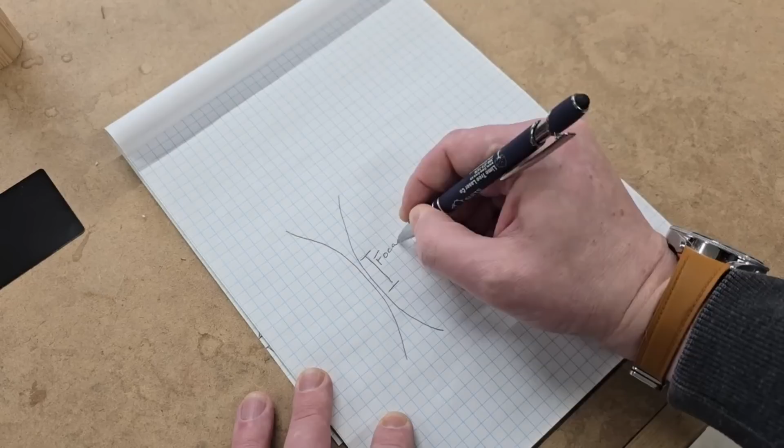If we think of a laser beam running through an optical lens, I think most people understand that we'll start to see a bit of a shape like that of where our laser is in focus versus where it is out of focus. This distance is what we call focal depth. Now, on a CO2 or a fiber laser, a non-3D, depending on your lens, this focal depth can be quite large, actually. One thing that we need to take into account is that with a UV laser, we have a very, very small focal depth.

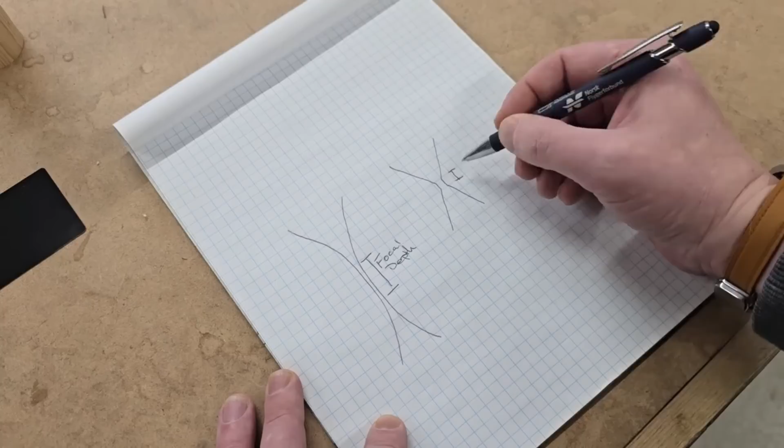Now, with that small focal depth, we get an incredibly great level of detail, but we do need to remember that it is very easy to get out of focus with a UV laser. On some materials, it doesn't make that much of a difference. On glass, this is critical, that we have a very small focal depth, and we need to do absolutely everything we can to ensure that we're marking in the correct location.

So that's just something I really wanted to quickly explain. I think most people do understand this, but hey, you never know. Some people might be buying a UV as their first laser, so this is something important to remember. We'll talk about it a bit more as we get to the laser, but just remember, when I say focal depth, this is the distance we're talking about here.

Okay, guys. Hi, welcome to the video again. Let's get started here. We're going to start with something very simple. We're going to do the aluminum painted card that you may have received with your laser. If not, they're all over Amazon. They're very easy to find. And it's a great way to really dive in and get your feet wet.

So first thing, you'll notice that we're working in our 200 by 200 millimeter workspace. We're going to do that for all three of these objects, so this entire video is going to be run on our 200 by 200. Now that gives us a 120 millimeter working depth, so that's how much Z height we have to work with. We'll be doing everything at 0, so we don't really need to worry about working depth at the moment. We'll get into that.

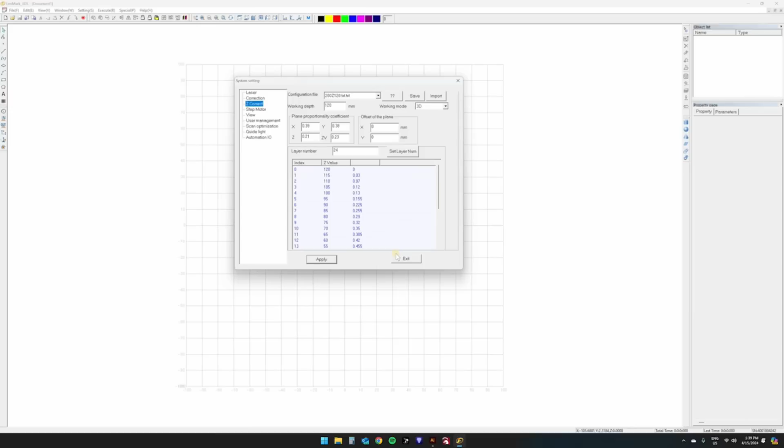So let's get started. First thing we're going to do is import a graphic here. And we've got a nice Haotian logo right here ready to go. We're going to resize it first. Let's just do 50 millimeters by 57. That ought to work just fine. Anytime you're working in this software and you see an apply button, always hit that to double check on things.

Next thing we need to do is set our hatch parameters. I don't want an outline. I'm going to use the optimized hatch with all of the optimization features. I'm going to leave the angle at 0 and we'll set a distance of 0.01 millimeters and hit apply.

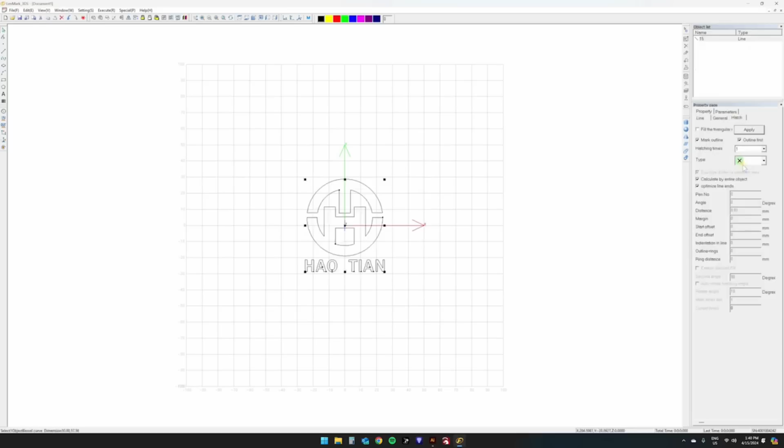Now I'm going to quickly set my parameters here also, and then we'll talk a little bit about how to set it up properly. With this I'm going to do 2000 millimeters per second at a frequency of 60 and a pulse width of 95. I run my laser with an inverted pulse width right here.

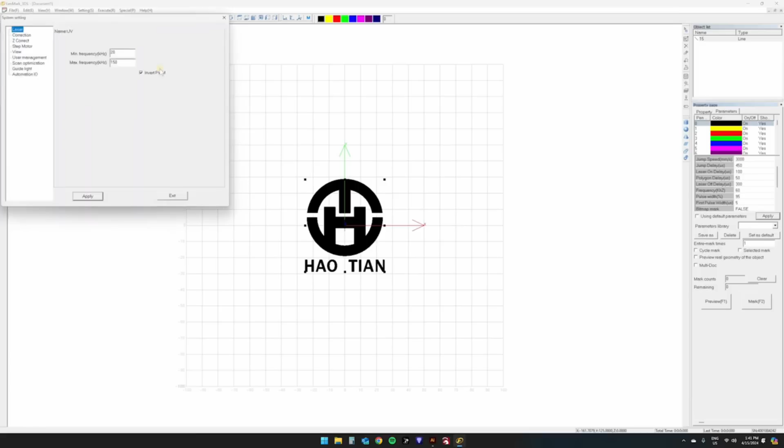And I do that so that 100 is full power and 0 is no power. I think a lot of people don't use the inverted, so your numbers will likely be different. I just prefer it this way. It just is easier for my smooth brain to figure out.

Okay, now, on almost any other piece of software not using a 3D laser, you would think right now you're essentially ready to go. We are not. Because we're using a 3D laser, if we start to rotate around, we can actually start to see that 120 millimeter working depth that I was talking about before.

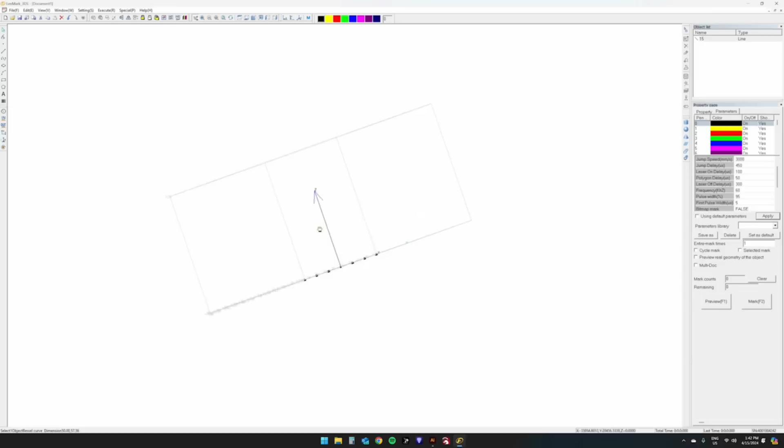Now, the way these lasers work is we always want to start at the top and work down. Technically you can do it from the bottom up. I find it can get a little confusing. And focusing, in my opinion, is a lot easier doing it this way. So what we need to do is move our graphic all the way up to the top of our box, which we know is 120 millimeters.

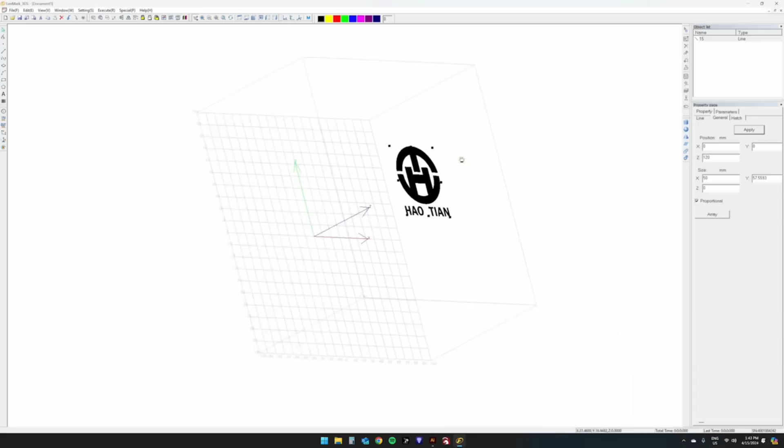So let's go to our properties, into general, and we'll set our Z height at 120 and hit apply. And now you can see we are right at the top there. So now when we go to focus and we use the focus distance that's written on the side of the laser head, we can focus directly down to that highest point. On a card, the highest point and the lowest point are the same, but this is something that you need to remember when we start getting into the 3D stuff, which we'll be doing right after this one.

So we're good to go. We've got our parameters set. We've got our hatch set. We've moved the graphic in its Z height all the way up to 120 millimeters. So let's head over to the laser and focus it and run this engraving.

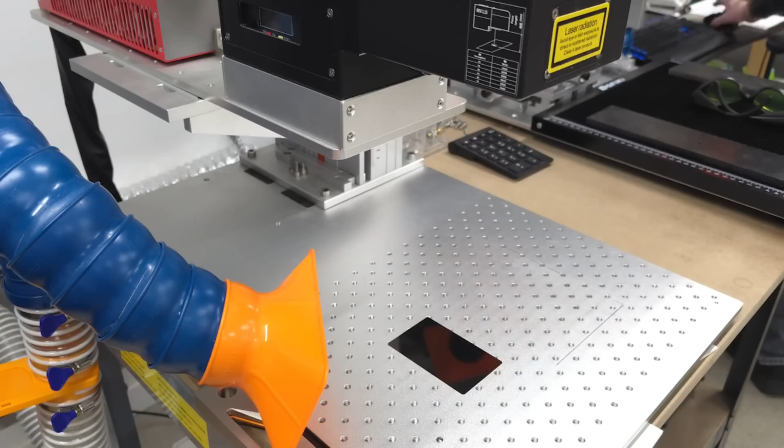Okay, we're at the laser. We have our card ready to go. First thing we need to do is focus our lens to the card. I use these focus sticks that I've made. I've got a few different styles. With this card you can measure. Why don't we show that?

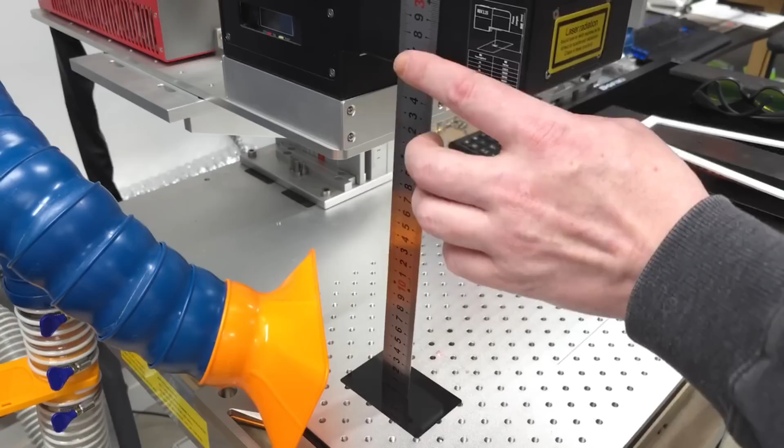You will want to make yourself some focal sticks, because at least here we can move the card off to the side and we can measure up to our mark on the bottom of the head. When you're using a 3D object or a glass that's going to be directly under the lens, it gets really difficult to use a measuring stick, so you'll want to be making a focal stick for that.

We can reference our chart here for our measurement height, and our 200 by 200 workspace requires a 234 millimeter distance. I'm just going to move it to the front so I can see it a little better. 234, there we go.

Now you can see we have our outline. It's a little difficult to see on this black card. These gels can help quite a bit. I'll have to give Dean a big thank you for sending me this. I believe it's a photography flash gel, but they work great.

We're ready to go. I use a wireless mouse here with shortcuts set on these buttons here. I believe it's F1 and F2 to preview and fire. So here we go, let's fire it.

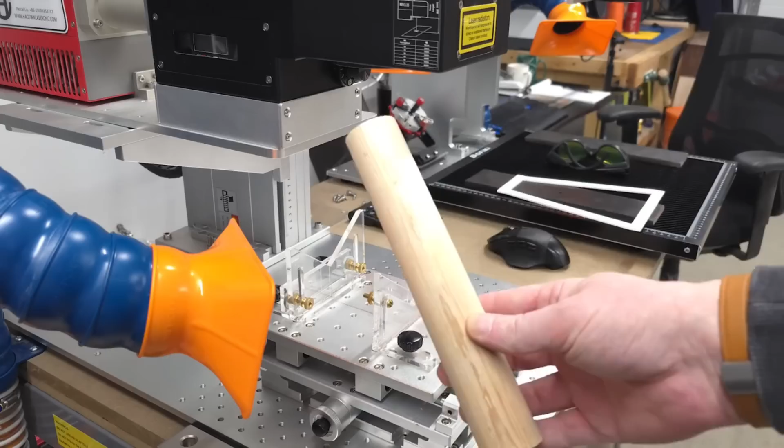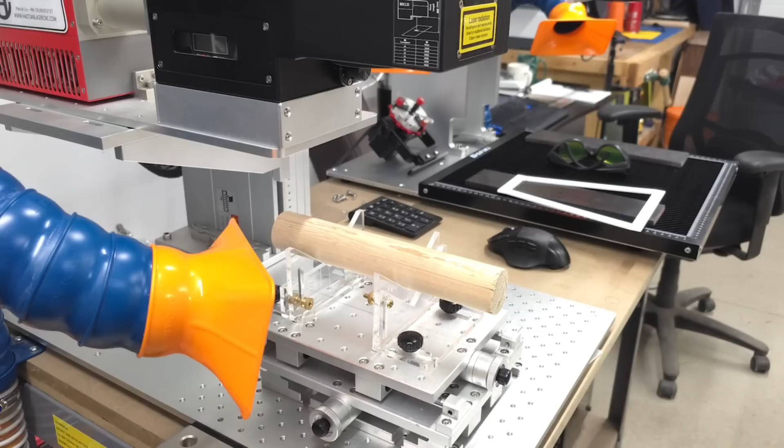Okay, moving on. Next thing we're going to do is do a mark on this 1.5 inch diameter piece of Hemlock dowel. Again, wood isn't quite as focal dependent as glass, so we've got a little bit of leeway. But what I'd like to show you here is that I'm going to be using this same jig setup for glass.

So you'll see that I've got an XY table here. I've ran a center line down it as well. You probably can't see them, but I do have center marks on the acrylic line here. And I simply just projected a straight line and line mark to line everything up with that. We'll talk a little bit more about why that is so important with glass.

Wood, it's not quite as detrimental, but it's a good practice to always make sure everything is as centered as possible when you're working with a 3D laser, and in particular glass. Like I said, we talked about that focal depth a little bit earlier, and with glass, that focal depth is extremely important.

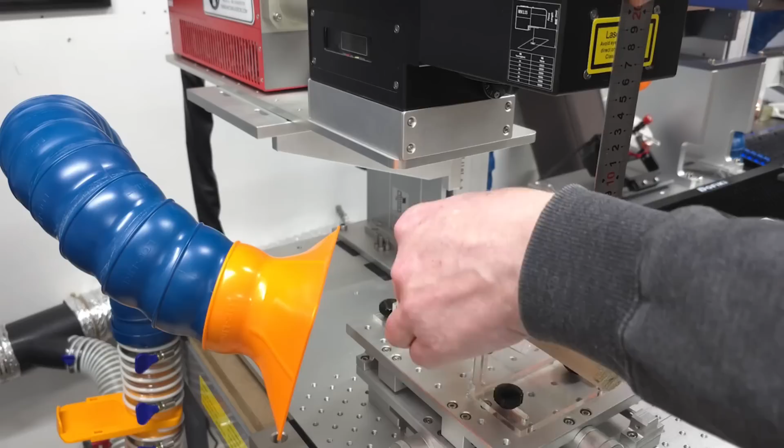So again, same thing we did before. We're going to focus the very top edge of our object to the lens, and this is where I say to use some kind of a focal stick. Again, I guess with this object, we can really pull it down a little bit and measure from there. Now, if this was not nearly this long and we needed it there, we can't really measure from there.

So let's upgrade to our focal stick. Let's use that for the rest of this video. Move the head up. And focus to that top edge. There we go.

Now, I typically like to set my object in its place and get it ready to go before I move into the software. And the reason for that is that you get a little bit better of an idea of your framing and everything. You want to make sure everything's in focus. And it's very easy to hop over into the software, get everything set, start framing, and then things don't look right. And the reason for that is that you're not focused yet, and sizes will change when they're out of focus.

So getting your object down, aligned, and focused first is just a good way to make sure that you don't skip a step later on. So that's ready to go. Let's move back to the laser. Sorry, back to the computer. Okay, here we are back in Landmark. I've just started a new document and just imported that same graphic. So let's get started again.

First thing we need to do now is create a model to engrave on. We're using a cylinder, so we'll start with that. We're going to need a calculator because we're working in millimeters. So a simple cylinder. Now, I said before that this was 1.5 inches. So let's get that into millimeters. That's 38.1. We'll divide that by 2 to get our radius, 19.05.

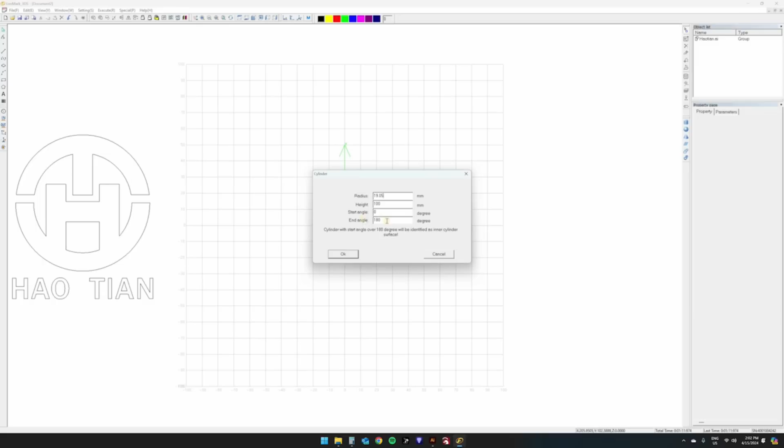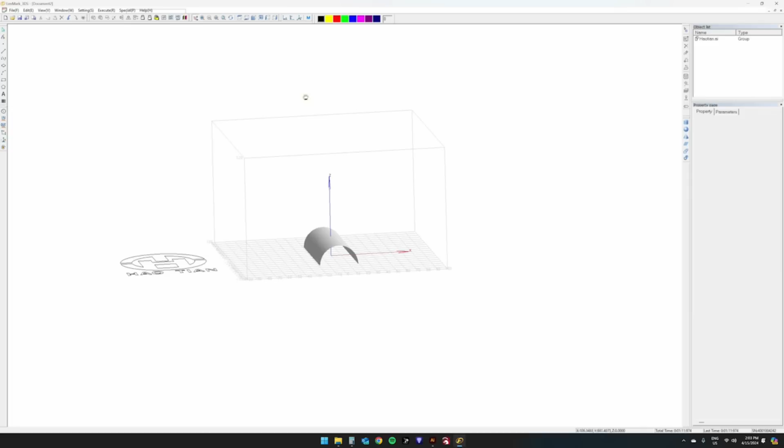For this particular object, our height doesn't really matter much. And I'll do a start at 0 and end at 180, so we only have half of a cylinder. There we are. That is our model that we will be projecting this graphic onto. Now, same thing. We need to move this up to the top of our working height. And we're going to have to put a little math into this one. Let's select it first. We can bring up our move window.

So we know our radius is 19.05. So let's just take 120, subtract 19.05. That gives us 100.95. That is the height we need to move this up to get it to the top. So we'll add that into our Z column. We'll click the relative position and hit OK.

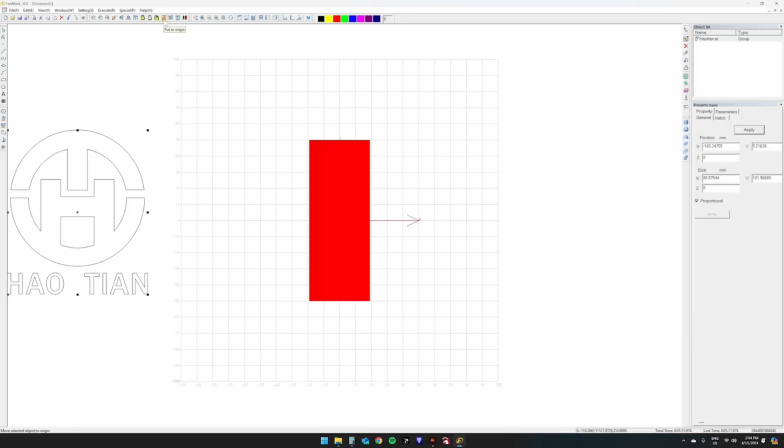Now we can choose a side view just to quickly verify that we did our math correct. The top of our cylinder is at the top of our working field. So we know that's good. Let's go back to our top view. We're going to select our graphic and bring it back down to the origin, which is 0 X, 0 Y.

Now for placement, I usually like to bring it up to 120 so we can see it on top of our object. Obviously this is a little bit big, so why don't we move that down? Let's do, say, 75% of diameter. So we have a 1.5 inch cylinder. We'll turn that into millimeters by multiplying by 25.4.

So that gives us 38.1 as a diameter, and let's multiply that by 0.75. So that's a 75% of diameter, which is a pretty common target for most cylinder engravings. 28.575.

So we'll resize this proportionally by that 28.575 and hit apply. That's looking pretty good. Next thing we need to do is we need to hatch this. Again, I don't want an outline. I'm going to do a bidirectional hatch on this one. I find it works much better for wood. Again, all of the options selected, but this time we're going to do a 0.07 millimeter line distance.

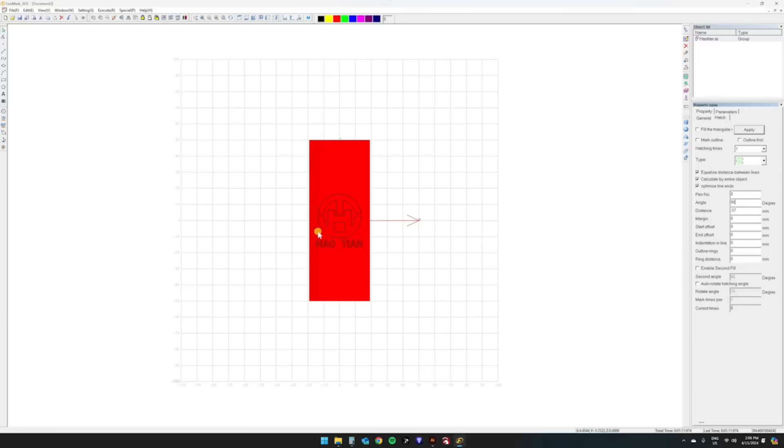And there's a few schools of thought on this when doing 3D engraving. Some people like to do a 90-degree hatch, which would be this direction, so that you'll essentially be engraving the entire thing left to right, and the focus lens doesn't have to do as much work. It only really has to move in, then out, then back in. If you're doing a 0 degree where you're moving, say, from bottom to top, your focusing lens on the head is going to be focusing in, out, in on every single pass.

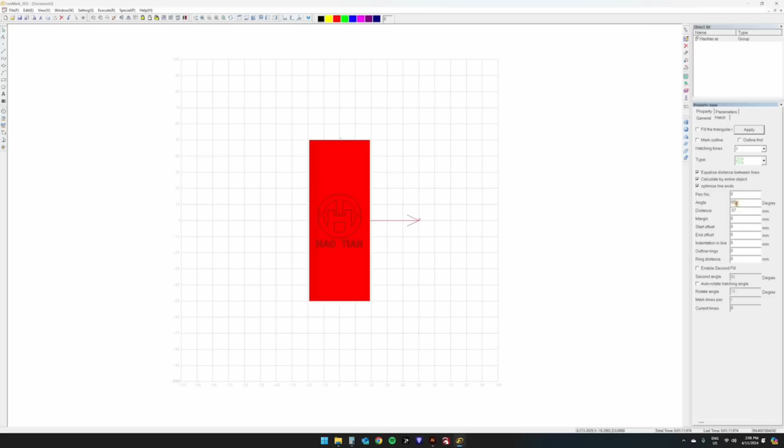Now, that being said, I'm going to do a 45 degree. And I'll tell you why. It's because with wood, I like to go very slow. We've got a pretty big line distance on our hatch, so I'm going to go right down to 100 millimeters per second. And that gives it a lot of time for that focusing lens to do what it needs to do. I will quickly set 65 kilohertz frequency, and again we'll run this at 90%, and again inverted pulse width, so we're on the higher end of power. We'll hit apply.

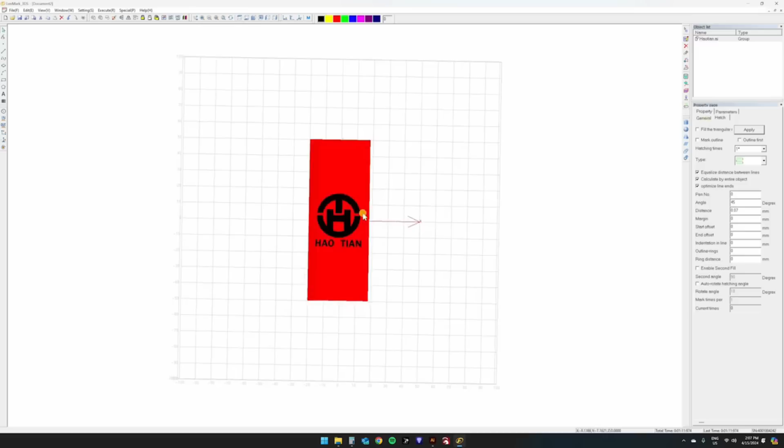Now, this is one of the common problems Mark has been seeing when we're projecting a graphic onto a cylinder. It's a little different when you're using these tools. You can actually project from that 120 height. When using imported models, you always have to have the graphic down at 0. And to be honest, whenever I'm doing a projection onto a 3D object, I always just start at 0 anyways.

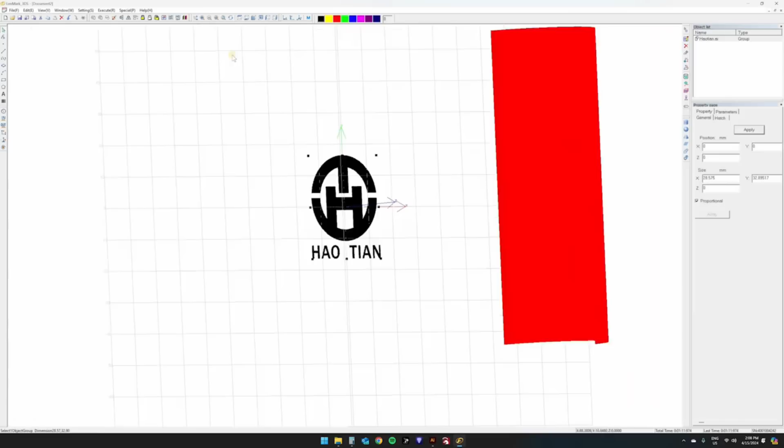You can still use the wrap feature, or you can also use the straight projection. Again, it's kind of hard to see. The difference is that this projection mode essentially projects it straight down. So you'll see that, again, it's kind of tough to see, but this is starting to stretch out from our original width up here. Whereas if we do the actual wrap, it's the same size. So essentially what it's doing is it's taking the graphic, and you can think of it as just shooting it straight down. So if you're looking at this object with your eye from this space, you will see that exact shape.

So I'm sure a lot of you know that when we're doing circular objects on a wrap on a cylinder, we start to get that egg shape. So we correct that by stretching our circle out into an oval, so that when we engrave it, we actually have a circle when you're looking at it. This straight projection mode is essentially just doing that for us. And if you're using an imported model, you'll have to use that mode anyways. So I use it most of the time. Sometimes I don't. It really depends on what I'm doing.

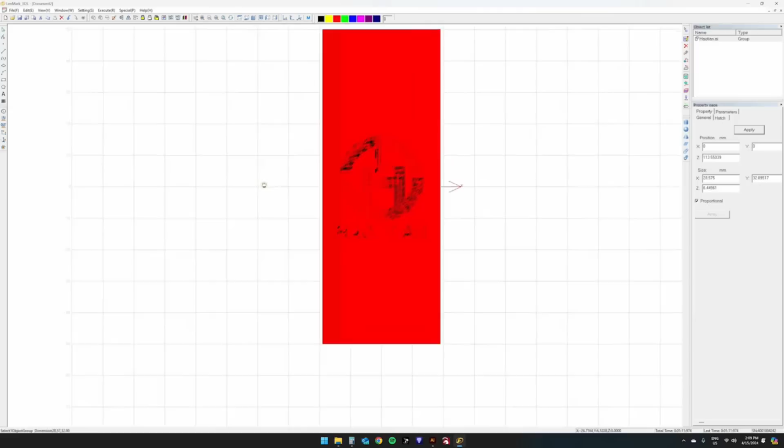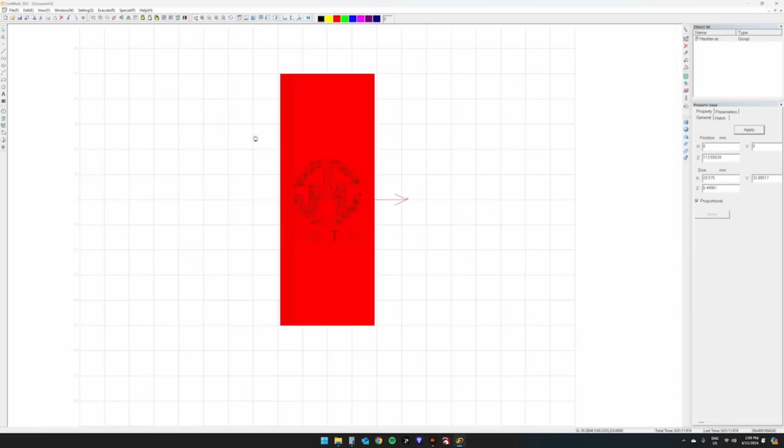So again, let's take a quick inventory. We've set our burn parameters of the Haotian logo here. We've projected it onto our cylinder. You can see it wrapping around. And we're also at the very top of our 120 mil working depth. So we are ready to go. Let's go back to the laser.

Okay, here we are. So again, we've already focused. We've already placed our object. We've got everything on the software set the way we want it. We can do a quick preview. Looks pretty good. Now I'm going to take this off of the tripod so we can get a better look at the actual engraving. Here we go. Let's fire away.

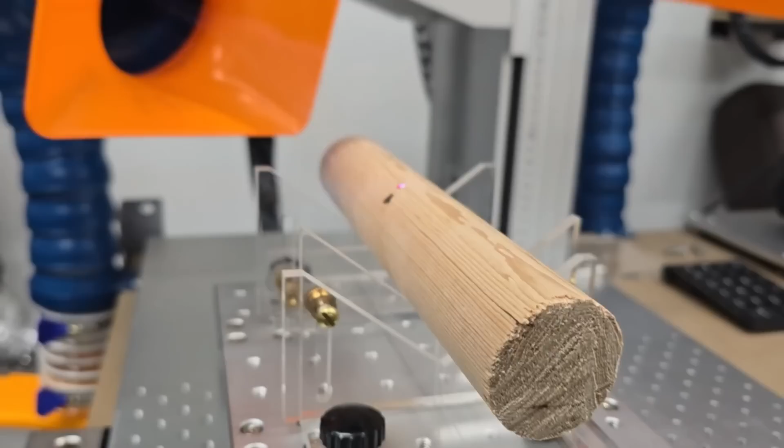Now again, I told you I like to go pretty slow with wood, but that beautiful black engraving is exactly why that can be tough to get with the CO2. I'm just starting to wrap around the other side now. Get a proper focus.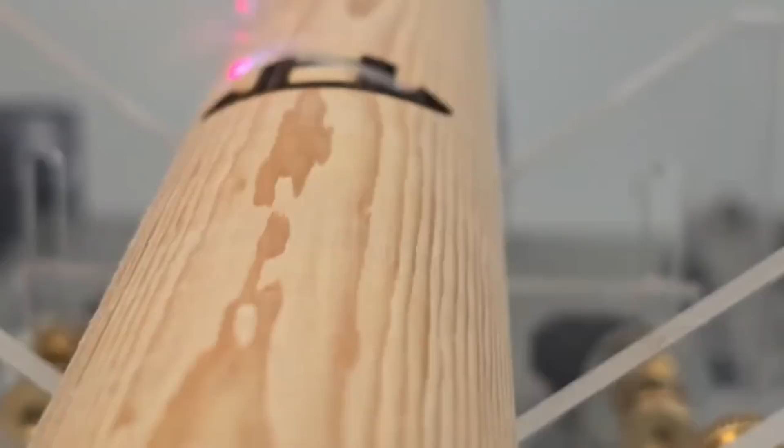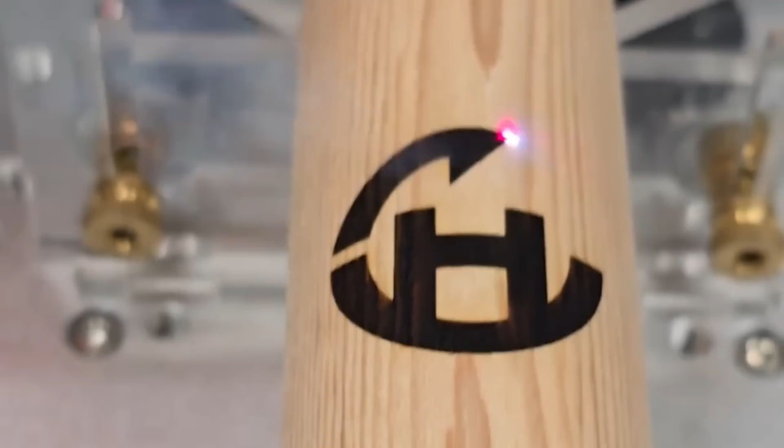With wood, you really can go a lot further on the diameter. Wood is very easy to engrave with the UV laser. Just a little bit of text left, and we're done. There we go. That's it. You can see we got that wrapped down.

A little tough to focus, which is going to be a lot more fun to deal with when we do glass. You'll find out glass can be really tricky to try and video and engrave at the same time. Now here's what I'm talking about with those projection modes. You can see that the circle is actually quite a bit distorted when you're looking at it from the side. But if we look at it directly straight on, we have a perfect circle. So that's really just what that projection mode is doing. Again, play around with it.

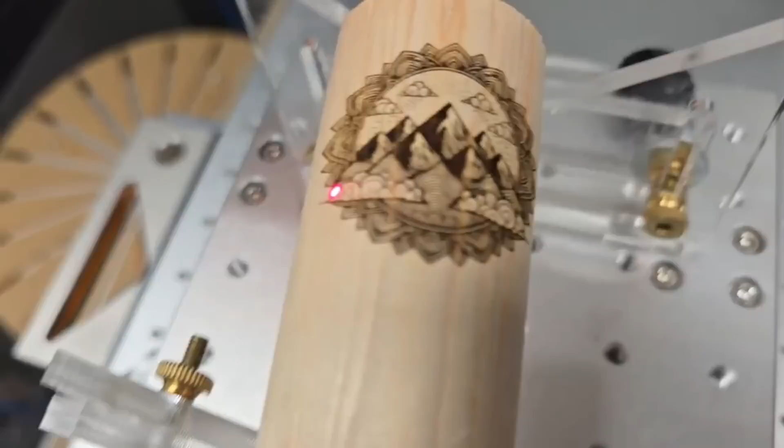So there we go. This dowel I just bought from Home Depot. Actually, it was in the trim section, so I was able to just cut off a couple of feet. It only cost me a couple of bucks. And I'm not going to lie, engraving these dowels is a whole lot of fun. Here's another engraving that I've done on it, and you can really show off the detail that UV laser can get. And it's the exact same process, same settings, same everything, just a different graphic.

So there we are. Congratulations. That may or may not be your first 3D engraving. If it is, good job. You're probably having a ton of fun right now. So let's move on to the real challenge. Glass can be tricky. It can be very tricky, and all of the things we've learned so far, we really need to take into account.

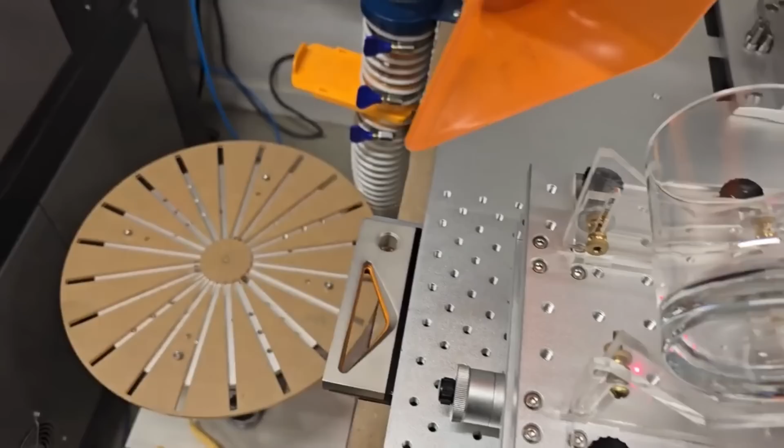Now, like I said, I'm going to be using this exact same jig for this glass. We're going to be doing a little bit different setup in the software, just a few extra steps, but we're still going to use a cylinder. Again, having your jig centered is critical. If you're using a proper cylinder, ensuring that this top is level is also critical. Now, I know that this is a cylindrical cup, and I know the height of these two standoffs are equal, so I know that this is level.

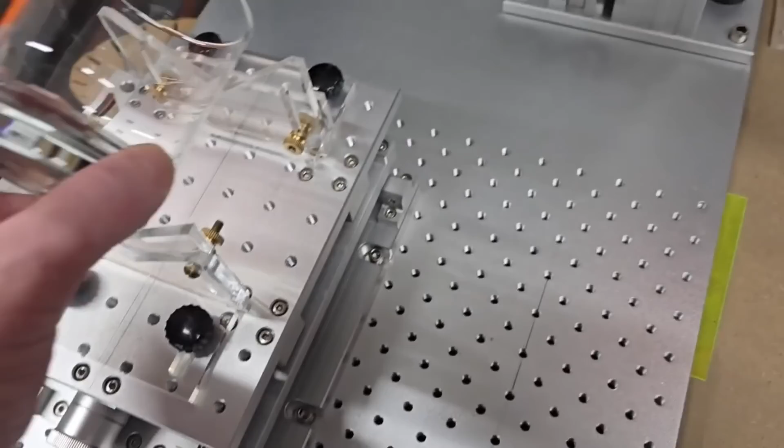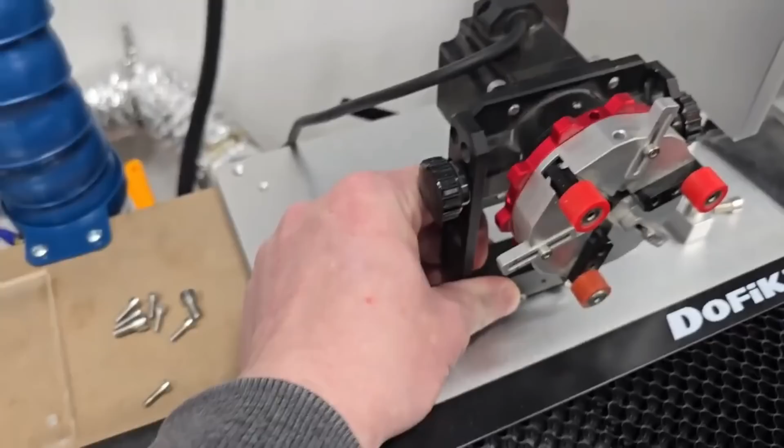Now, being level is only pertinent if this is a cylinder. If you have a tapered cup that has a smaller diameter at the bottom, we don't want that top level. We want to make sure the cup is straight. And there are many different ways to do that. You're going to have to find your own way. I find using my grip rotary is a great way to keep things straight for tapered cups when doing glass. I don't actually use the rotary, I just use it to hold glass. But for cylinders, this works great.

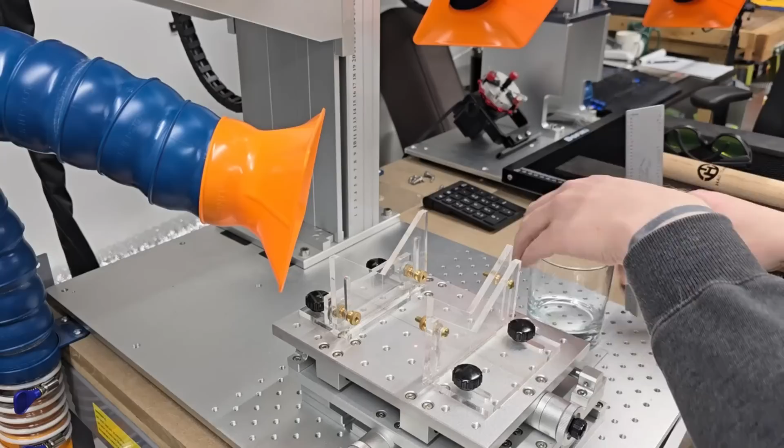Now I'll quickly pop this back into the tripod here. Sorry for my fat fingers. We're going to do the exact same thing. We're going to set our focus height, again with our focal stick. Now actually, I'm going to double check this because this is not looking like a true cylinder. It is not. There is quite a taper to that. So I'm going to reset. I'm going to set up with the grip rotary there. And we'll come right back.

Okay, we're back. So we've reset using our grip rotary. One thing I'd like to mention is that I have the head of my laser squared to this table. So what that means is that I can use my engineer square to ensure that the XY table is square to the table itself. And then I can also make sure that the rotary is square to the XY table. That's going to keep everything straight in both our X and Y directions.

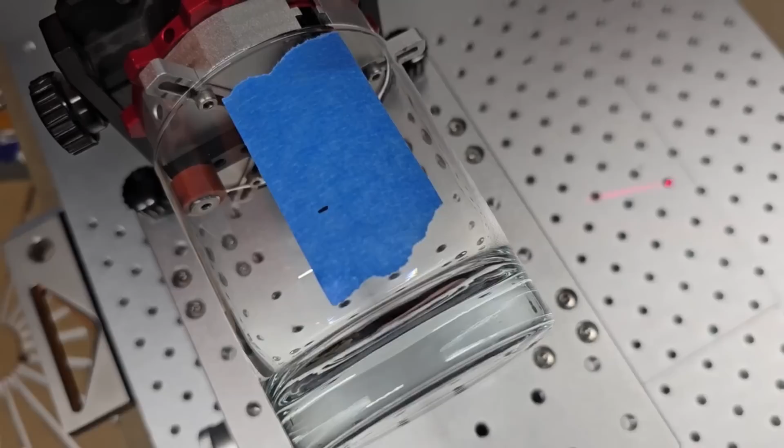Now, I know that this rotary is already centered in our X axis, but we do need to center the glass in our Y axis yet. So I just put a quick piece of tape onto the cup and mark its center line, and we're just going to move the XY table until our alignment cross lines up with that mark. So there we go. Our glass is centered in our X direction, it's centered in the Y direction, and let's remove this from the tripod again.

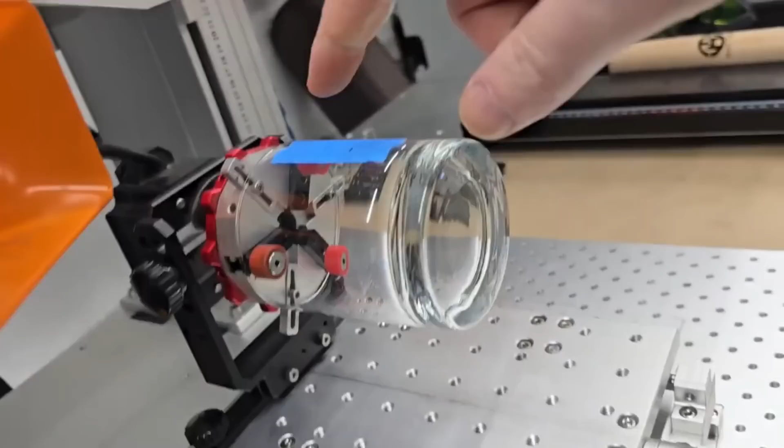This top edge surface is not level. The central axis of this glass, you can imagine going through the very bottom all the way through. This central axis is parallel to the table. That is the important thing with the UV laser. That's how our model is going to be set up.

If this top surface was level, we also have to figure out how to rotate the model in our software to reflect that. That's a tricky process. I know this rotary is set up with a face square, which means that I know this central axis is also parallel to the table and will match our model in the software. And again, we'll double check our focus to the highest edge, which will be at the top.

There we go. Remove this piece of tape. All right, let's head back to the software and get this set up.

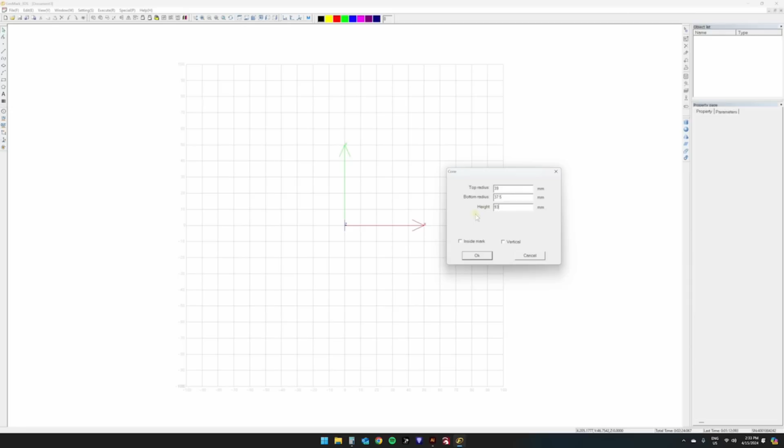And we have a height of 93. We'll hit OK. There we go. We have our cone. Now again, same as before, we need to move this top edge right up here, which will be our highest point, up to our 120 millimeter working space. So we will move it again. And you can go back to your cone here just to reference your heights and radiuses.

So we have a top radius of 39. So again, onto our calculator, we'll do 120 minus 39. That means we need to move this object up by 81 millimeters in the Z height. So again, into the Z.

I've already forgot what that was because I have the memory of a goldfish. Sorry about that.

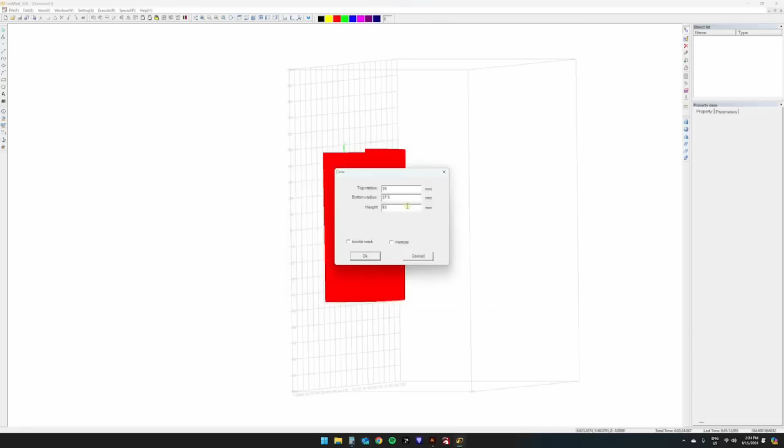Top radius of 39, 81. Let's remember that this time. We're going to move that up by 81 millimeters relative. Okay. Again, you can do a side or back view to double check that the very top edge of your model is going to be at 120. So we're good to go. Our model is set.

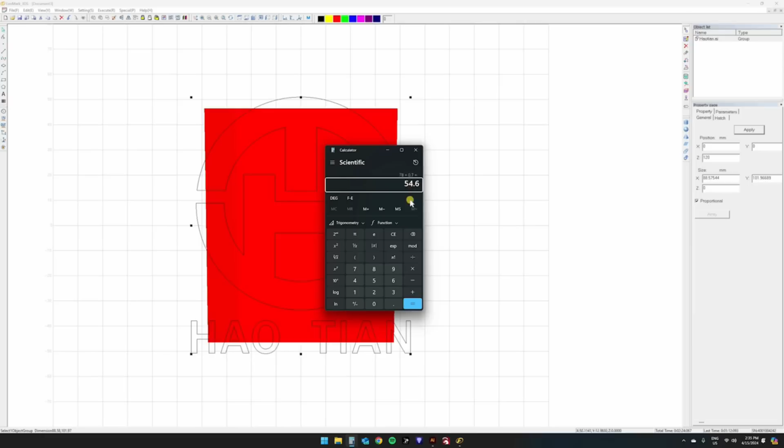So again, we'll import our Haotian logo. And again, I like to always move it up to 120 so I can see what I'm doing. Now for this, we said we had a top diameter of 78. Let's target 70% for our width. So we'll multiply that by 0.7. That gives us a 54.6 millimeter width for the graphic. So we'll just call that 54. We'll resize that in the X direction proportionally.

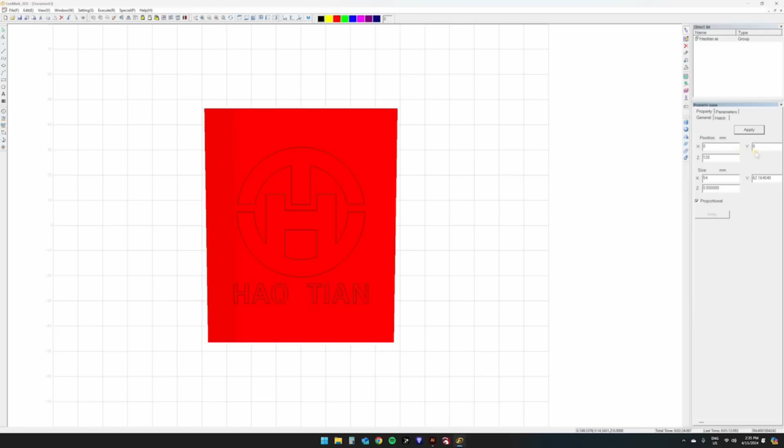We'll hit apply. Now this rocks glass has a very thick glass bottom, which is somewhere around here. We could actually measure it, but I'm not going to. What I'm saying is that it looks a little funny if you engrave over that thick glass bottom. So let's just move it up a little bit. I think that'll look quite nice there. Apply, and we'll move on to our hatch settings.

Glass, I like to use a bidirectional. And this I actually do like to do an outline, and I like to outline it first. Sometimes I find it just gets the laser firing a little quicker, and sometimes you'll get a bit of a lighter engraving on your first passes, so an outline seems to help with that. Again, all the optimization settings on. I also like to use a 45-degree angle for glass because we're still going to be moving quite slow. Use a 0.025 millimeter line distance and a single pass. So we'll hit apply on that.

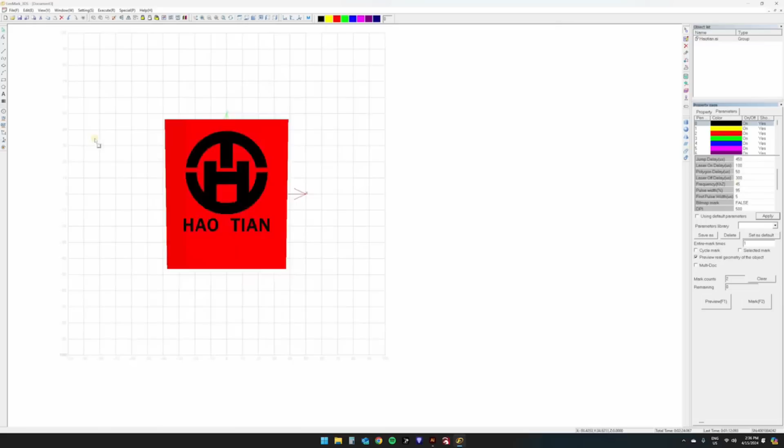Let's quickly move into our parameters again. For glass on a single pass, I like to run a 350 millimeters per second speed with a 45 frequency and pretty close to full power, 95. Again, I am using inverted power pulse width modulation, so 95 is almost full power for me. We'll hit apply on that. Now again, we want to move this graphic back down to 0.

And then because it is a circular logo, I like to use the straight projection. And those lines always look a little funny. This is just one of those oddities of LaserMark. It kind of just is what it is. Sometimes things can look a little funny, but once you get to the engraving, it looks just fine.

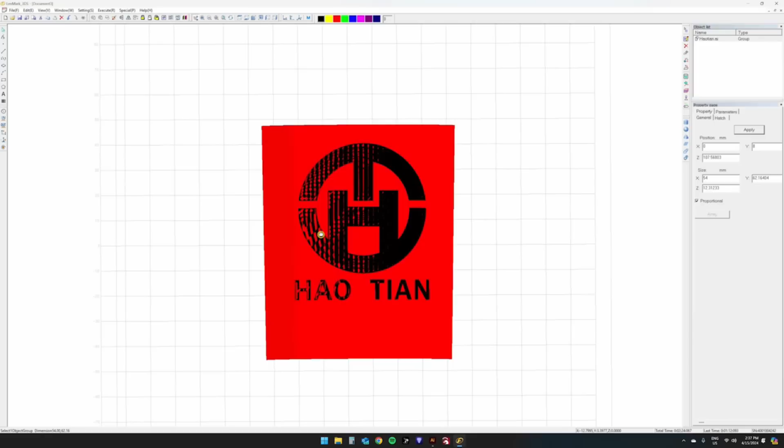So again, a quick little inventory. We've created our cone, our tapered glass. We've moved that up in the Z height. We've set our hatch and our engraving parameters the way we would like, and we've projected that graphic onto the model, which again has some strange lines, but we don't need to worry about that. Okay, back over to the laser. Let's fire this one.

Okay, so we're back at the laser. We had a little bit of problems on the last engrave, I'm not gonna lie. I know I was playing around with the 64 and 32-bit software, and some of my calibration got thrown off, so I have to make a few adjustments here. I did slow it down a little bit, and I do see there's some inconsistencies in the glass in this area, so I just decided that I'm going to run a crosshatch just like a test.

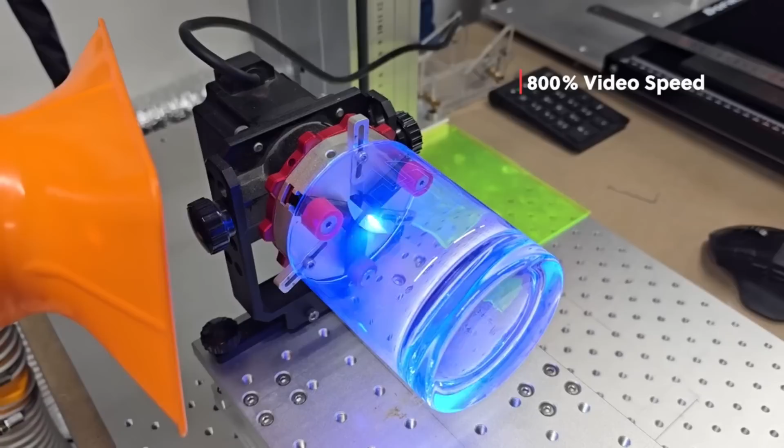Other than that, everything else is the same. Setup is the same. The alignment is the same. The projection on the software is the same. So we'll run this. Here we go. Okay, there we have it. Nice little Haotian rocks glass with a nice frosty engraving there.

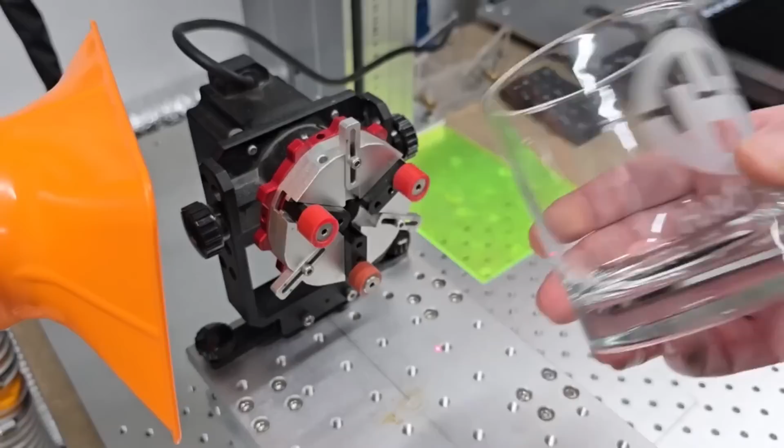So again, on glass, things can be tricky. Take your time, make sure everything is square, straight, aligned, focused, level, that your model is correct and accurate in the software. And don't get frustrated, because it does take some time to get the knack of it.

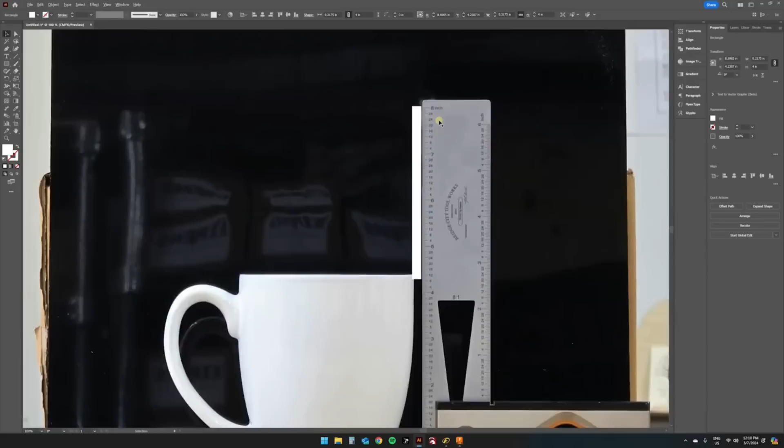So again, let's zoom in. We're going to move this box onto our reference size mark. So we've got an 8 there. This isn't the best picture, but these are 32nds of an inch. So, you know, if we're a 1/32nd off, that's not going to make that big of a difference. So again, get it up on that mark. Now we're going to hit S to scale. We're going to put our scale anchor there.

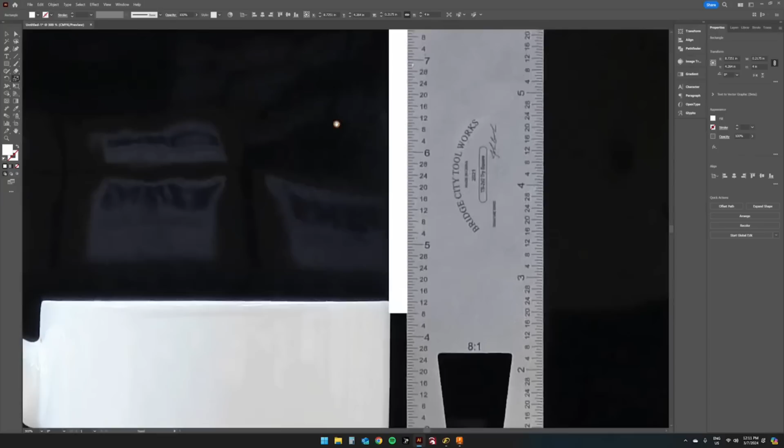And again, zoom in. We're going to resize this image until the bottom of our box lines up with our 4-inch mark. Now I've got the box selected, so I'm going to have to go back and deselect that to make sure I have my image selected. And again, hit S. Place our anchor. And start resizing. Now remember to hold Shift when you click and drag, so that you don't mess up your proportions.

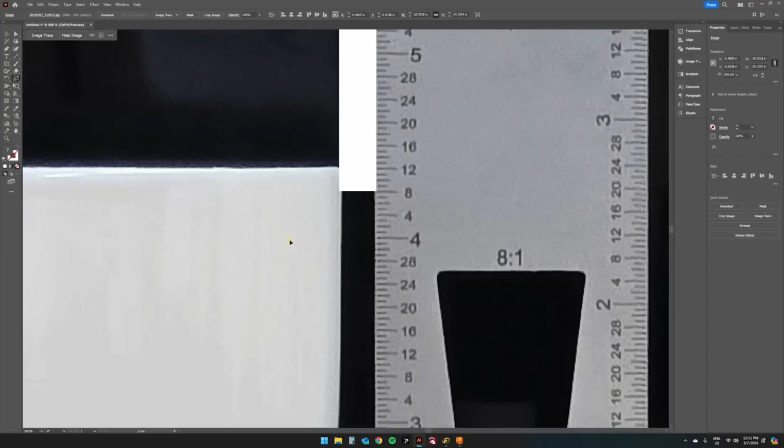Here we go, 4 inches. So 1, 2, 3, 4 inches on the ruler. Our box is 4 inches tall. So we are now scaled and our image is good to go. Let's delete that. Okay. Now I also like to just center things, and I will also just lock this. Sometimes it makes things a little bit easier when you're drawing over top of it. But first, let's change the opacity of this a little bit.

Sure, that looks pretty good right there. Okay. And now we can lock it. And then we're going to grab our pen tool. Let's do a transparent fill, and let's do a red stroke.

Now you should be able to follow the exact same steps whatever graphics program you're using, as long as you have the ability to export a DXF. You can do this in Inkscape or Corel, or I have Illustrator, so that's what I use.

So now we need to draw an outline. It's pretty simple, and we only want to do half of the outline. We don't need to do the whole thing. So we're going to draw this outline here, and I always start with just creating a line the entire diameter of whatever you're working on. A nice, just straight line.

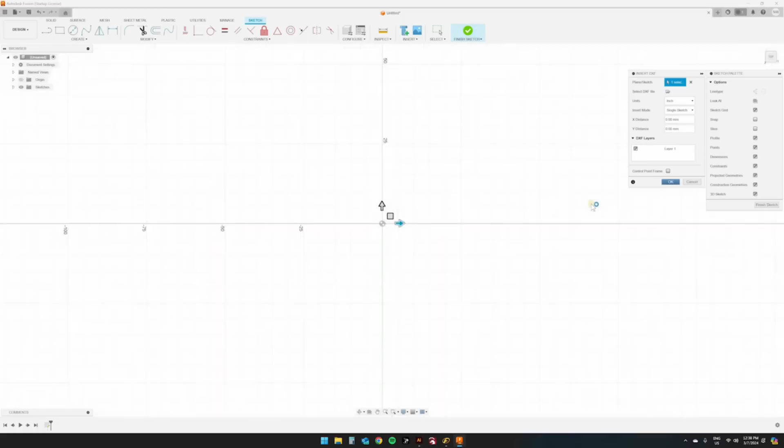So we're going to start with drawing a sketch on our XY plane, and we're going to insert that DXF that we just created. There's mugspline.dxf. Now we created it in inches, so we're making sure our units are in inches, and just hit OK. Oh, and it looks like we had a little box hiding there, so we can get rid of that. And that's all we need. Finish the sketch.

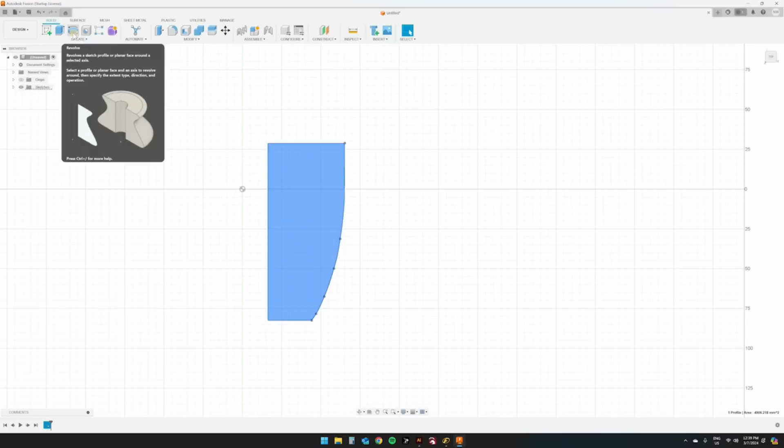Now we're a little far away from our origin, so we're just gonna bring it back closer. That's all we need to do. And now we're going to do what in Fusion is called a revolve. I've seen it called rotate, lathe, revolve. I think I've seen it called twist before. Essentially, it's just going to spin the spline around an axis.

So we select that. You can see that the profile is already selected. And this is the axis that we want to be using right here. Click on that. There we go. We have a 360-degree mug.

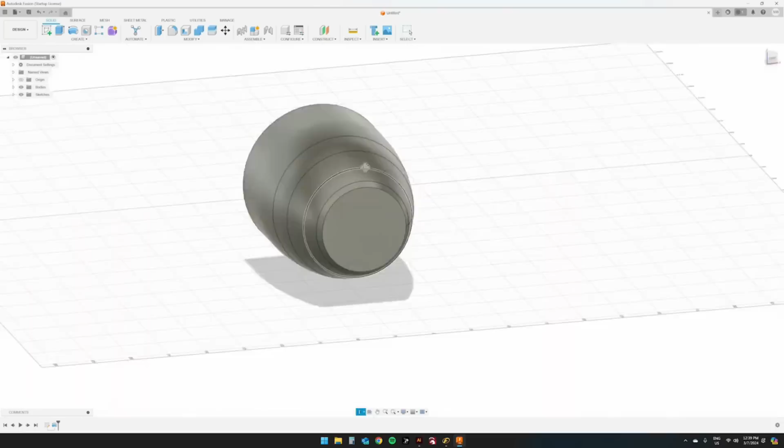Now, another thing I like to do just to keep things a little bit easier on Landmark is I like to chop the bottom half of this off because we don't really need it. And there is another benefit that we're going to see when we start manipulating this in Landmark. So to do that in Fusion, we just create another new sketch on our XY plane. Sometimes this gets a little funny. There we go. And we're just going to create a rectangle that's bigger than our model. That's all we need.

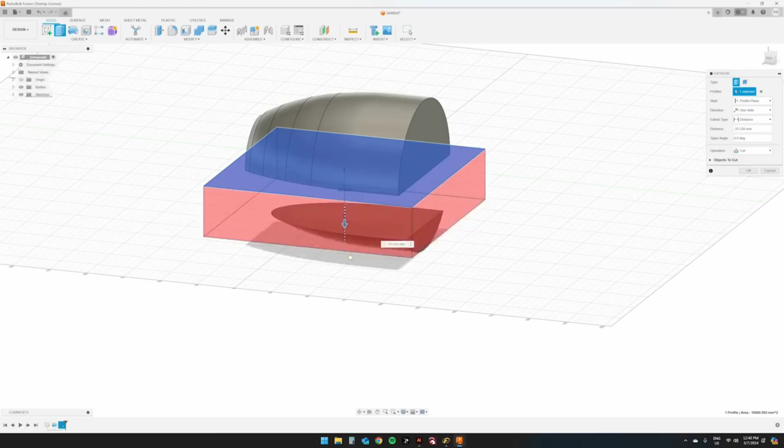And then we're just going to extrude it down. Make sure our operation is set to cut. Hit OK. Now we've only got half of it. That's all we need. Okay. There we go. Let's export this into a mesh. All we're going to do is click the export button. You don't need to do the 3D print. Just click export into an STL. We'll leave that in millimeters.

Why not? Fusion knows. But if you are in another software and you need to make sure everything is matched up, then just keep it in millimeters. You'll know right away when you get it into Landmark if it's not sized properly. That's what our mesh is going to look like. I find medium refinement is plenty. The more triangles you have in your model, the slower it's going to be in Landmark. And I'm not going to lie, Landmark is not great at handling 3D models, but it is what it is.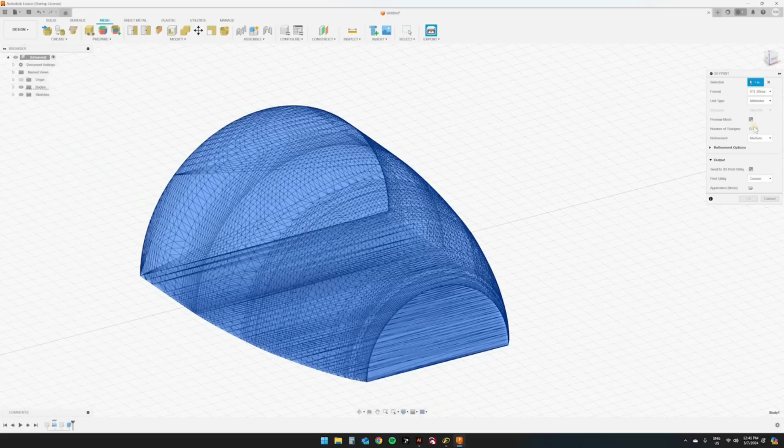Oops. To make sure we get this out, we just need to unclick Send to 3D Print Utility. We can hit OK. That's a good place to save it, and we'll just name it Mug. And save. And there we have it. Sorry about that, we don't need that.

Okay, so that's our model. So we have an STL ready to go, ready to get into LenMark. So we're going to finish this video here, and we'll start another one over in LenMark. So keep watching.

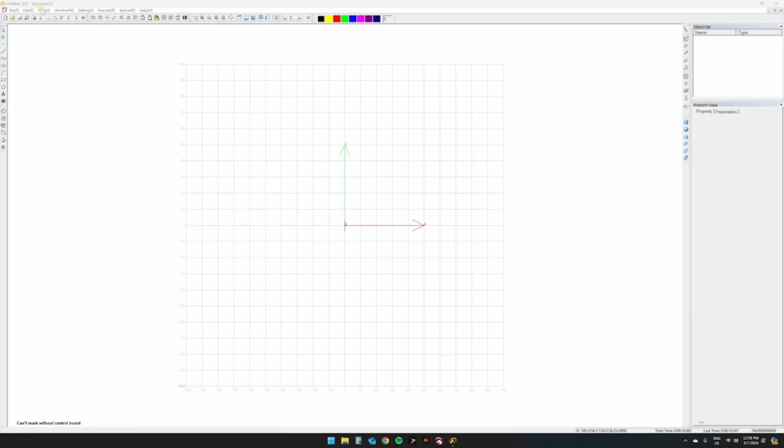Okay, so here we are in LenMark 3DS. We're going to import our model, we're going to position it, and then we're going to move over to the laser and get the mug itself aligned, focused and ready to go. So just to let you know, for this project we are using our 120mm working space. So let's get started. So first thing to do is import our model. And there it is.

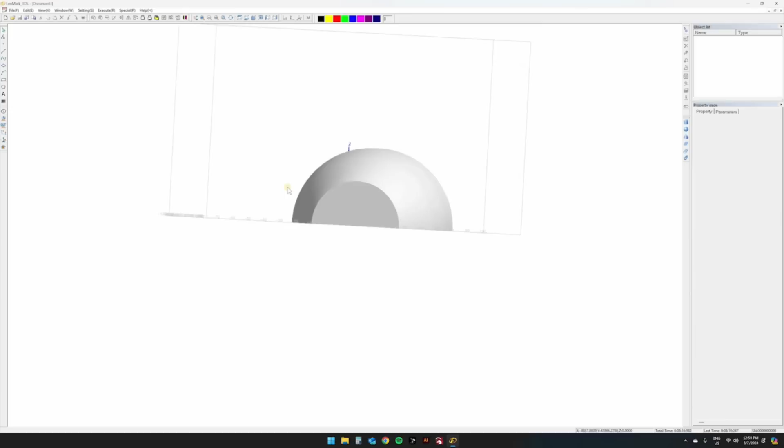Nice thing with Fusion, and I'm sure most other software, is that it will align that bottom face to the bottom of your working space. So there's a few things we have to do. First thing is to select the model and move it to our XY 0 point. Easy enough. So that will be directly centered under the laser. Now we just need to bring it up.

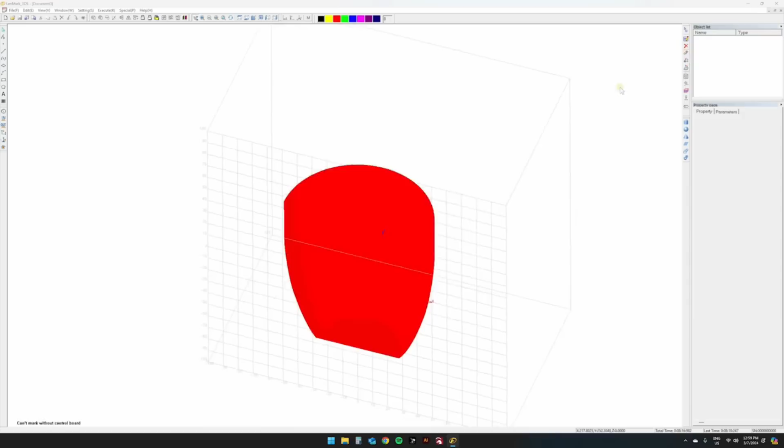Now the reason I like to do only the half model with the bottom cut off is that we now already have our radius measurement from here to here. So if we bring up our move window, we can see that Z height, that is our radius. So all we need to do is take our calculator, take our working depth, subtract that radius, 48.88163, and that is how far up we need to move our model.

So we'll just copy that, paste it into Z, click the relative position, hit OK. That's it. And now you can see we are exactly where we need to be. So it's as easy as that.

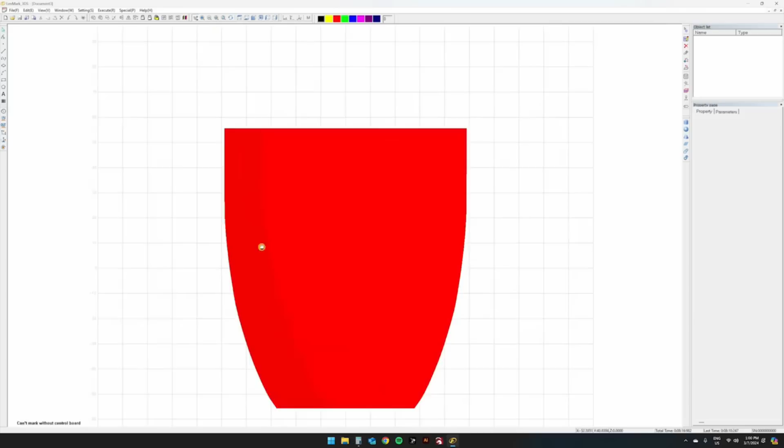Next thing I'm going to do is let's bring in a graphic to engrave. So we'll import this nice Haotian logo. I like to bring it up to 120 for positioning purposes. That's obviously way too big. Let's try 65. And we'll move it up a little bit. That looks like it might be a little big.

When it starts wrapping around that mug, I think this text is going to look a little strange. I don't have any problems with it actually engraving. I just think it's just going to look a little weird. Let's try 60. Yeah, I think that looks a little bit better.

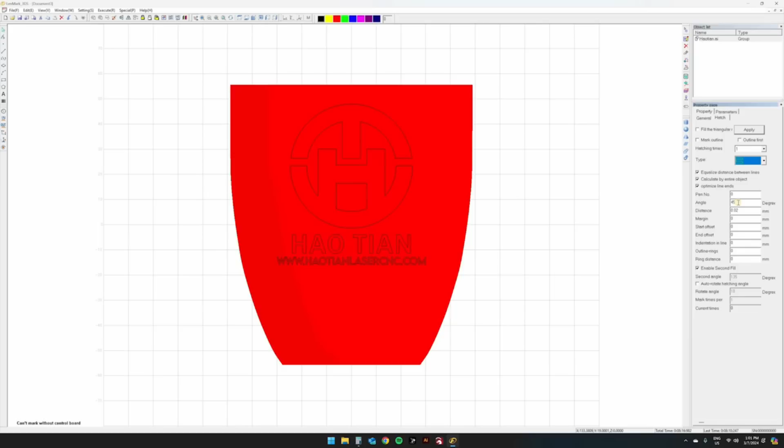Okay, let's move into our hatch. With these mugs, and with most glassware, I like to use an optimized hatch, no outline, with all the optimization options on. This is already set correctly, a 45, 0.02mm line distance. We're going to do a second pass at 135. We'll hit apply. I think that's going to look nice. So let's move that back down to 0.

And let's project it onto our model. Now, I will say with these STLs, you do want to try to keep them as basic as possible. When you start getting a pretty complicated model and a pretty complicated graphic, it will bog down when you're applying the graphic to the model. Once it's on there, the system seems to run fine, but it can take a few minutes sometimes.

Let's head over to our parameters. We don't want to be using default. With these mugs, I find for my 5 watt, 450 speed, 50 frequency, 90 pulse width on my inverted pulse width. So 100 is full power for me. That seems to work fine.

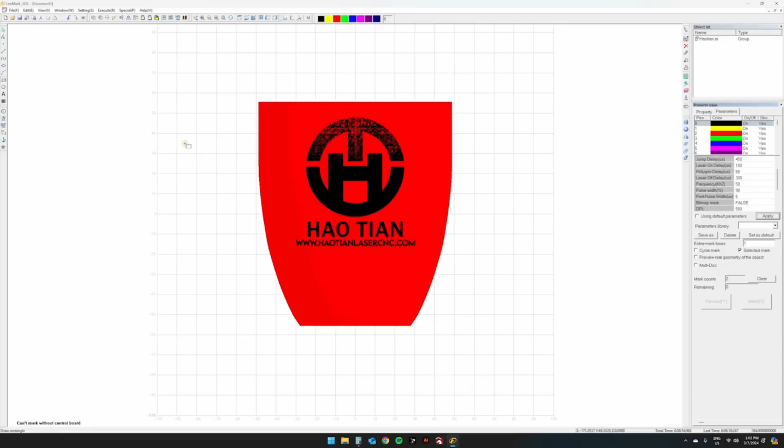Now, one last thing I'm going to do, though, which I find really makes aligning the mug under the laser easy, is I like to draw just a small rectangle at the very top edge of my model. You're not going to see it while you're dragging it because it is underneath. And then I will also project that. So it's a little tough to see, but there is going to now be a reference line at the very top edge. And it doesn't need to be centered. We'll move over the laser and I'll show you exactly what that does.

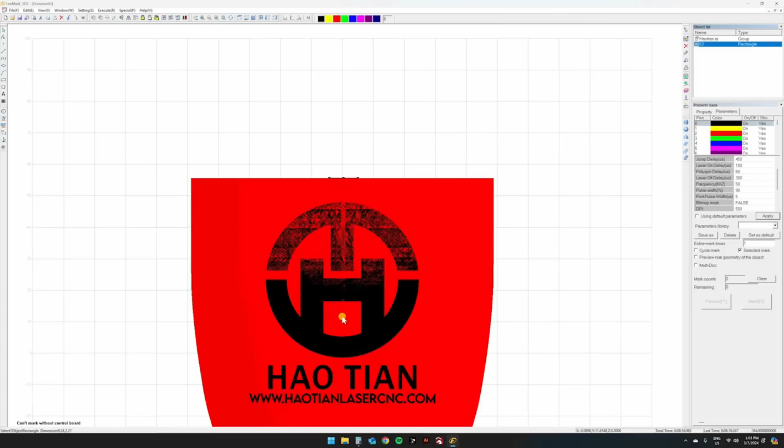Now to do that, I'm also going to check the selected mark option for our preview. And I'm also going to make sure I have the rectangle selected. Now my laser's off right now, so I can't hit the preview button. I'm going to turn it on and start the preview. We'll get the camera over there and I'll show you exactly how this little box helps lining things up. So let's head over to the laser.

So here we are at the laser, and you can see we've got that preview mark started, and here's something really important, is that this is not focused yet. And what I wanted to demonstrate is that you need to have your laser focused to your object before you start aligning it. Because what you're going to see, as I move this laser head down into focus, this is going to move because we're using it on a 3D object. So watch what happens when I bring it down. Look how much it starts to move.

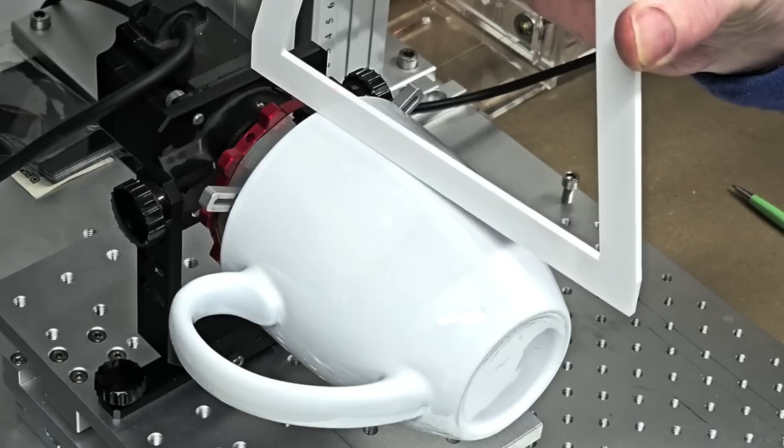So let's get this focused. We're going to focus to the highest edge. There we are. Now we simply just need to move the mug on our XY table so that the top of this rectangle is just aligned with the top edge of the mug. There we are. As simple as that. We are ready to engrave.

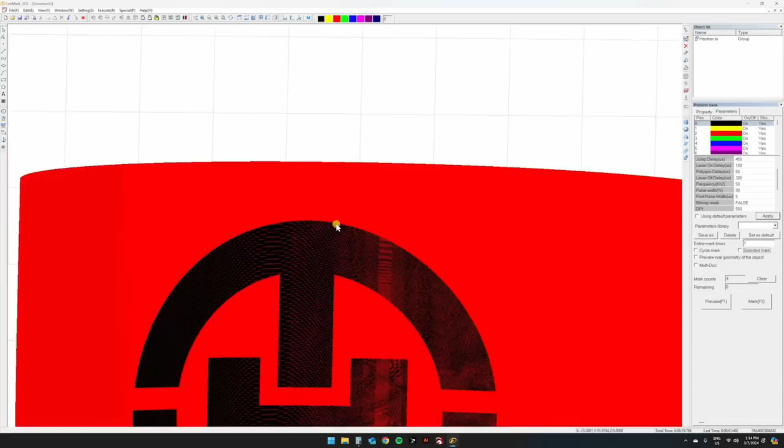So we'll delete that rectangle that we put on because we don't need to mark that. Let's delete that. We can turn off the selected mark option. We're going to preview the real geometry. We're ready to go. Let's head back to the laser. Okay, we're ready to fire the laser here.

One other quick tip I'd like to give. If you're going to use a rotary like this for holding glassware, get yourself a good engineer square. Make sure the face of your rotary is square to the table. When you've done your calibration, you've made sure that everything else is square and level. That's a really quick way, and a lot of times rotaries can be out by a degree or two. So just make sure that the face of your rotary is square, especially with glassware. These mugs engrave quite well, so we're not quite as worried about it. But again, all things UV, you want to be as accurate as you can.

So there's our preview. We can do a quick glance at the screen. It looks like we're where we need to be. Let's fire it. Okay, so there we have it. That's the finished product.